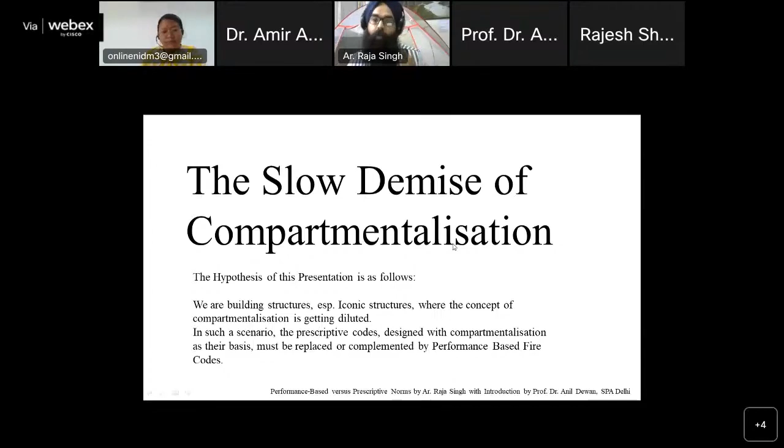The hypothesis of this presentation is that we are building structures, especially iconic structures, where the concept of compartmentalization is getting diluted. In such a scenario, the prescriptive codes designed with compartmentalization as their basis must be replaced or complemented by performance-based fire codes. We are seeing the slow demise of compartmentalization, and I will show you how.

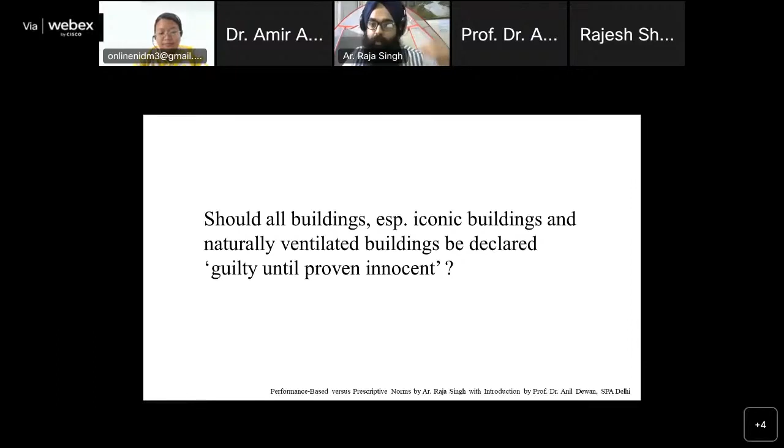I also want to ask you a question: should all buildings, especially iconic buildings and naturally ventilated buildings—and I'll tell you why naturally ventilated buildings—be declared guilty until proven innocent with respect to fire spread? So I want to ask you one common question.

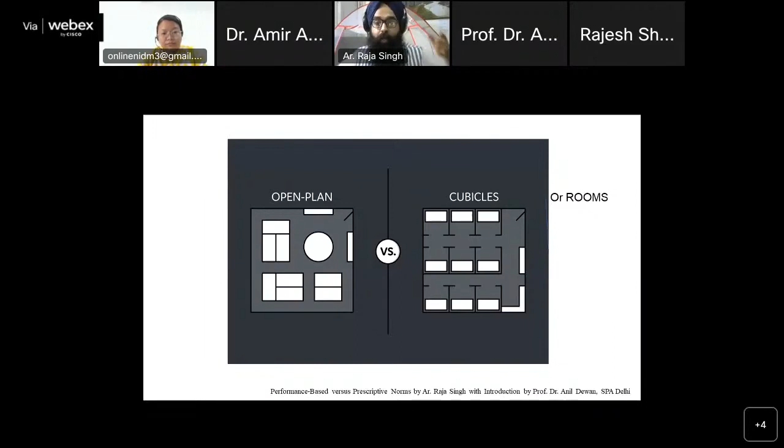The concept of offices has changed. Earlier it used to be room, room, room, closed room, and there was compartmentalization even in the way teachers used to be sitting in corridors. But today the concept is of open plan. We have huge floor plates which are open plan, and there is no compartmentalization. Not only that, there is vertical non-compartmentalization in buildings, which I'm going to show you.

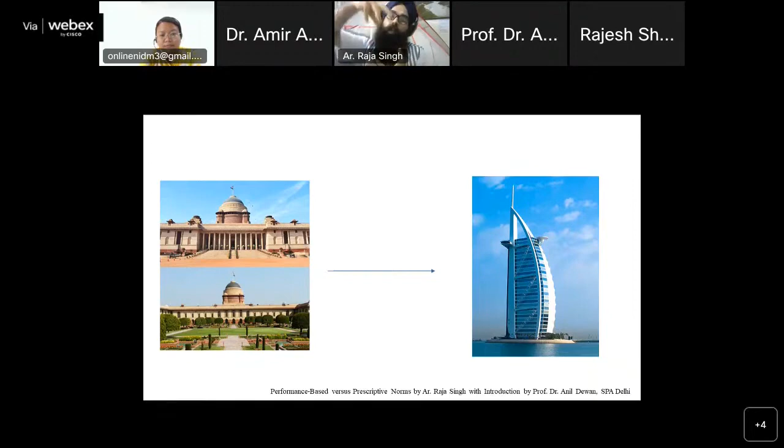For example, if we look at an iconic structure on the left, which is the Rashtrapati Bhavan, the way older iconic structures used to be, compared to Burj Al Arab. The comparison is that in one, compartmentalization has been key, while in Burj Al Arab there is a shell structure—not typically a shell, but inside there is a continuum with respect to the vertical space.

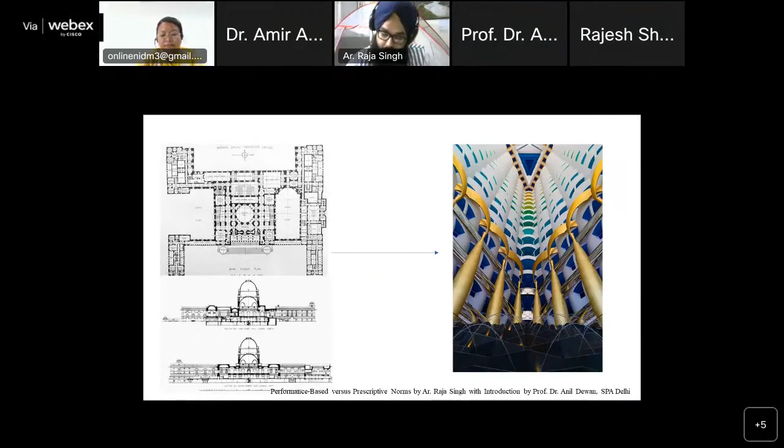This is the atrium area of the Burj Al Arab on the right, and on the left you can see how finely divided are the compartmentalized older iconic structures that we have been dealing with, the basis of which has been the formation of our prescriptive-based fire codes across the world and also in India.

I went, in 2019, to the Kartarpur corridor, Indian side, made by Creative Group, and I realized that this is such a huge space, like an airport terminal. Over there, sprinklers had to be put based on a prescription, because sprinklers have to be put in such structures based on a prescription-based code. But I want to figure out what is going to happen when fire happens in such a structure, which challenges the way compartmentalization has led to creation of prescription-based codes.

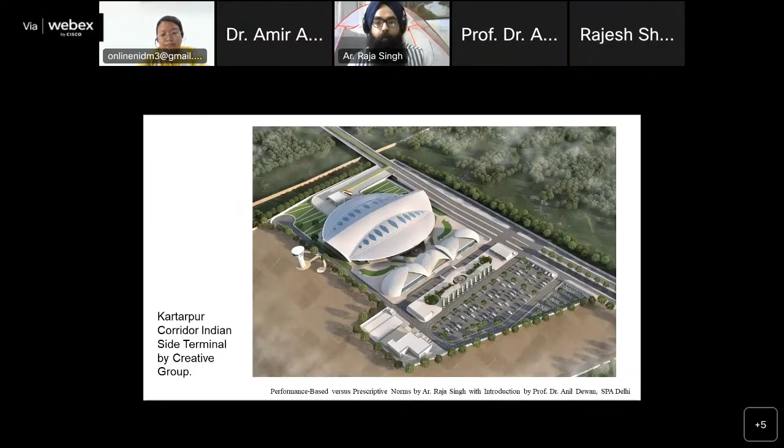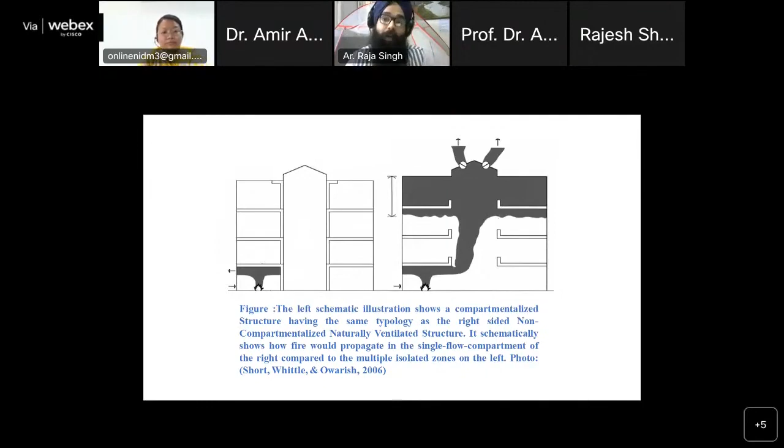But we want such buildings for other important things—continuity, beauty, aesthetics, and so many other things. So we cannot simply say no to such structures, but we have to take care of the fire issues in them. Traditionally we have been dealing with prescription-based codes, which are beforehand instructions, and compliance with which the buildings may remain safe. There have been cases where prescription-based safety in these buildings has ill-performed.

Our take is that fire performance of naturally ventilated buildings needs to go through the scrutiny of performance-based analysis. This system has been developed earlier through zone models like CFAST models, and finally to field-based models which also use CFD technology. This can be read as I talk further.

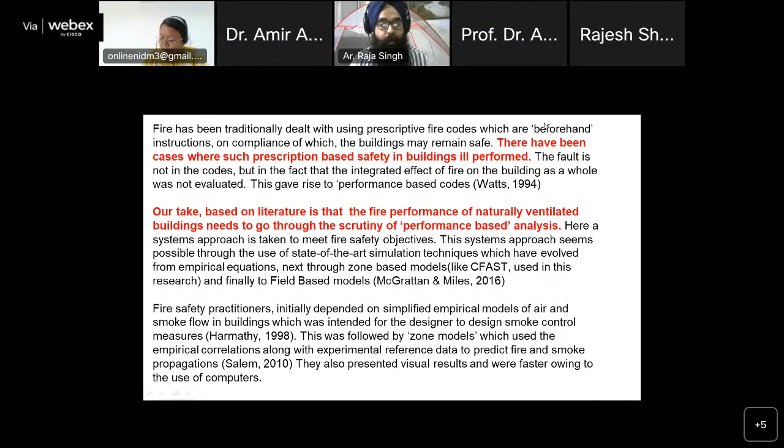Yes, let's see some simulations before I move forward. Can you see the screen, Yogita?

Yes, this is a naturally ventilated building typology, chimney type structure. Very common - this is from a very famous hotel in Chandigarh, the Marriott Hotel. On one side, they have created a chimney type structure, and on the other side there is a restaurant.

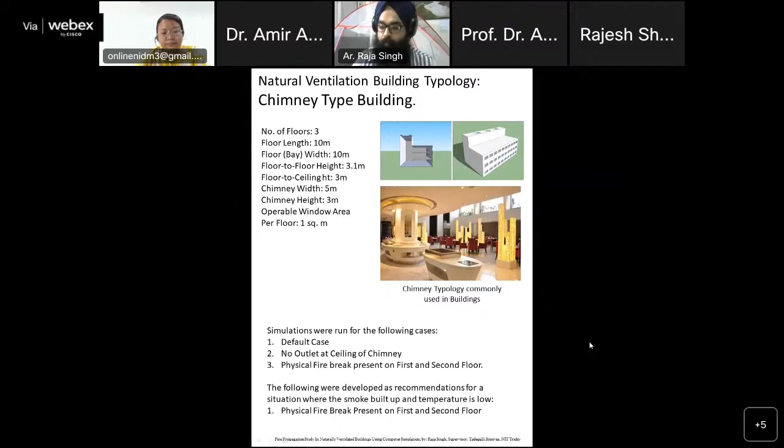You can see the various cases we have dealt with in this building. The first case is the default case: if the fire is at the ground floor, and even if there is an opening or an exhaust at the top in the chimney or shaft area, there is still smoke and high temperatures in the upper areas. Black represents smoke - there is a build-up of smoke in the upper floors, very much there.

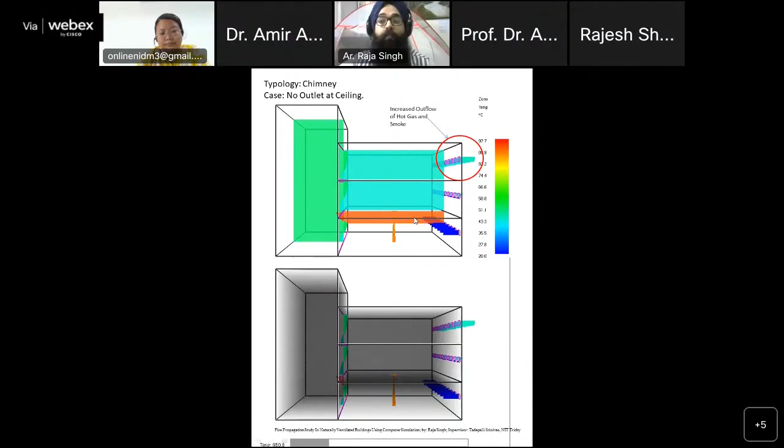Sometimes in buildings you must have noticed they simply cover the atrium as a retrofit for air conditioning and don't give requisite exhaust of the smoke. A consequence of this, as sir was saying, is that the building becomes air conditioned and the smoke spreads to other habitable areas where there will be people in the same space.

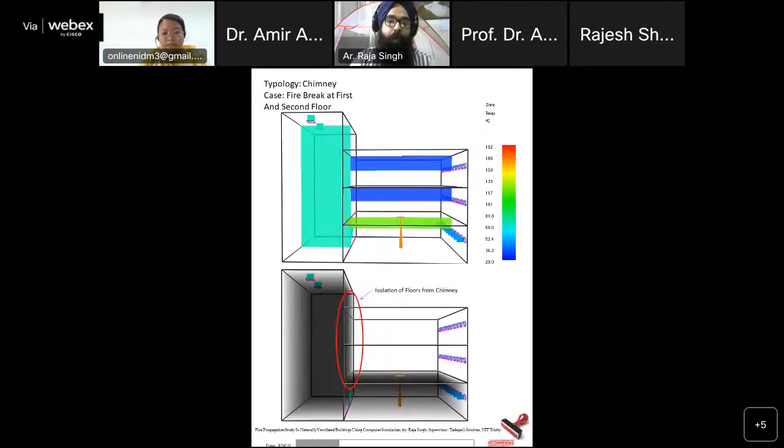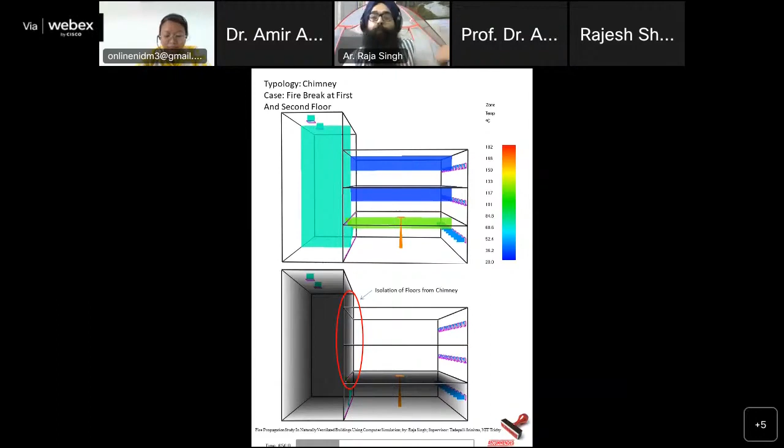So you can see a very easy representation of the same smoke spread. Same again, fire breaks at the first and second floor - if you simply use compartmentalization in these spaces, you see absolutely no smoke in floor 1 and floor 2. This compartmentalization always works, but for other factors we compromise it. That's an important thing - if we don't have compartmentalization, we have to at least check buildings without it against performance-based codes.

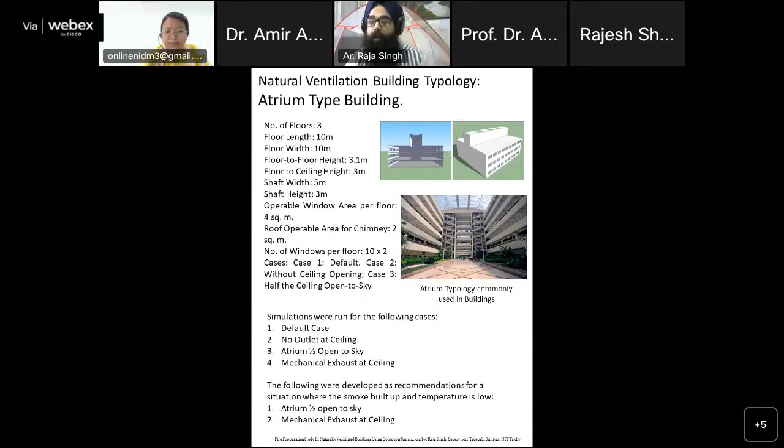So we have to have redundant systems which work even if the exhaust system fails during a fire. And we will see what happens.

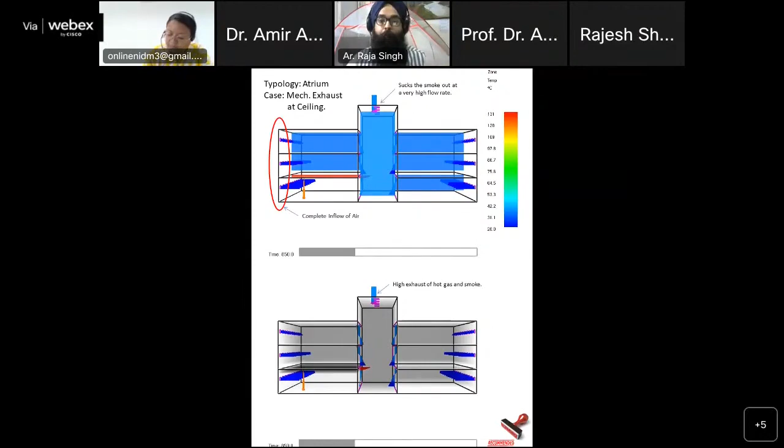Now here again, atrium with mechanical exhaust. Same result as making half of the atrium open. Everybody will agree, oh, mechanical exhaust, we already know, fire people know, fire engineers know. But what happens when this system fails? In that case, we need to have redundant systems which are openable, also available in such buildings. And the basis of what I'm trying to tell is that for such buildings, there should be an absolute requirement to make sure they go through a performance-based check.

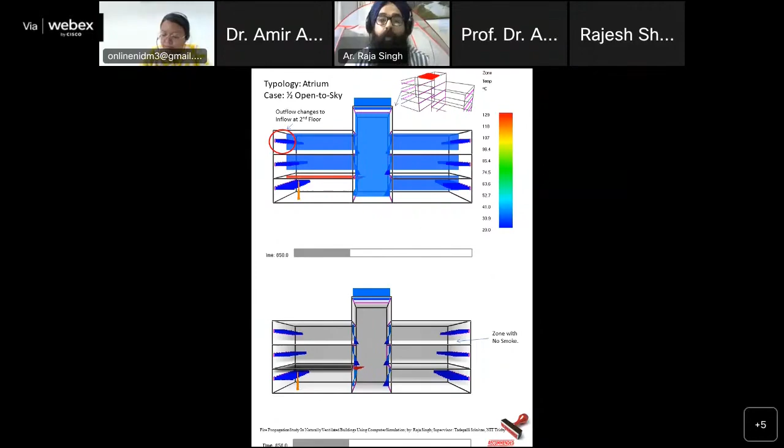So let's go ahead with natural building or the shaft type, as we have discussed earlier. Now, shaft type is like there are two shafts. This can be a not properly designed staircase shaft, or this can be a normal shaft which has been made for thermal passive heating, passive cooling purposes also.

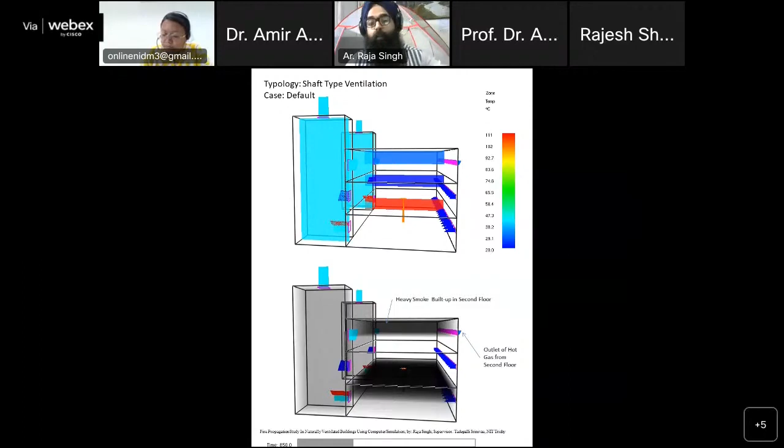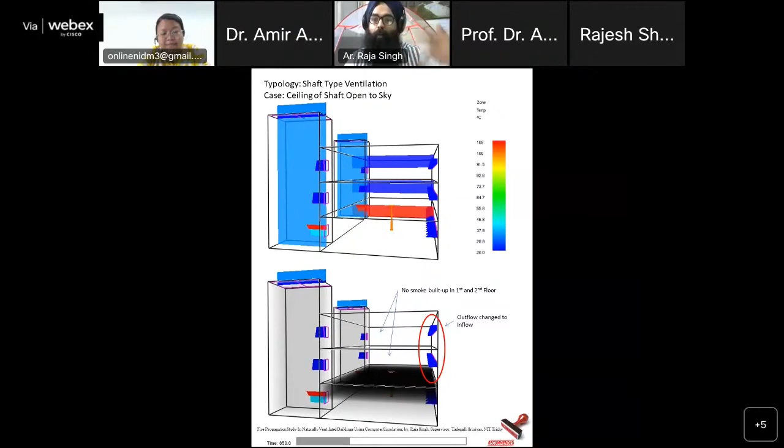Here you can see floor, there is fire at the bottom, and in the default case, the smoke automatically goes into the topmost floor. You can see if there is no outlet at the shaft ceiling, same performance, so much deep smoke on the second floor is visible. But here, if we open the ceiling or shaft open to sky fully, you see absolutely no smoke in the ground, first, and second floor—all the smoke directly exits. Now, what I'm trying to show through this, everybody will say this is common sense, but common sense is uncommon. So that is not being implemented in many of the buildings today.

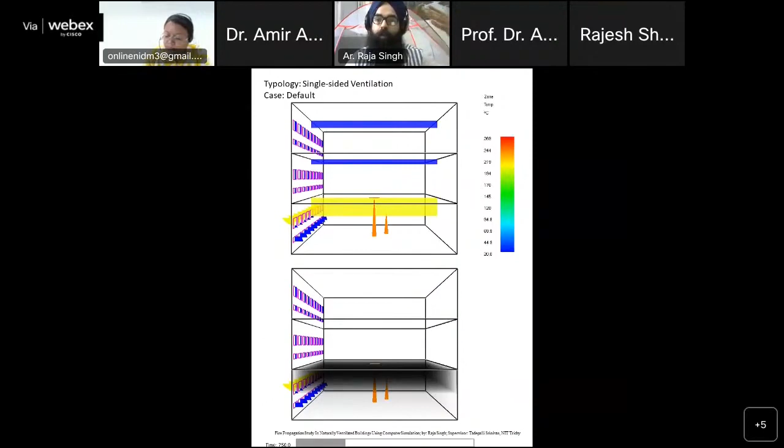Same in the single-sided ventilation systems also, it's compartmentalized, no problem, no sharing of vertical circulation, so no problem at all.

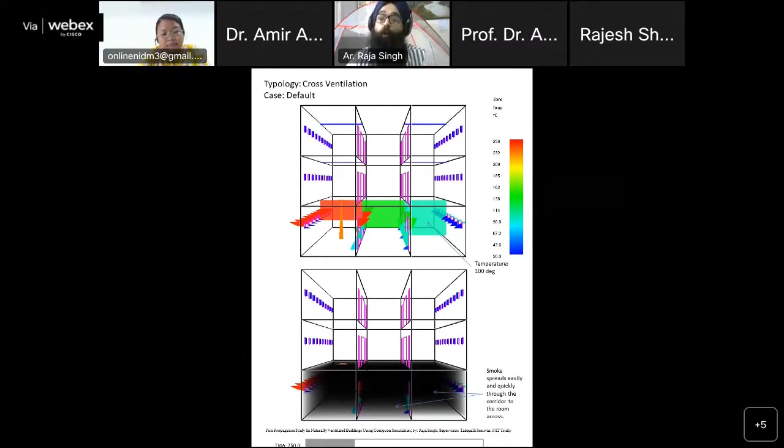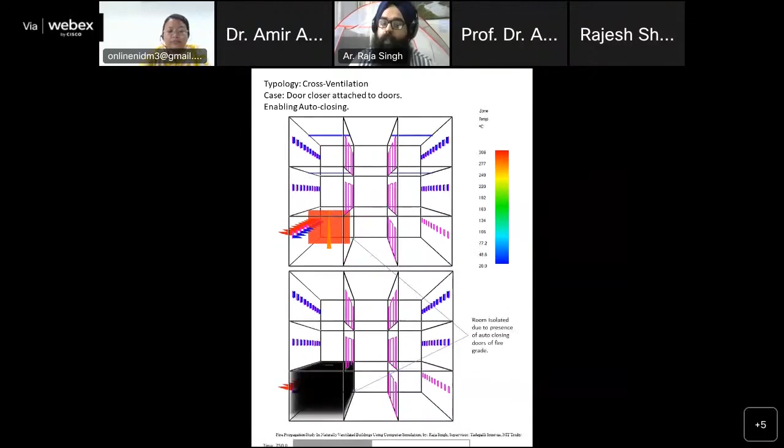Cross ventilation—here we have taken an example of cross ventilation where the fire door, as somebody was saying, auto closing was not working. So we have shown if auto closing was working and the doors are isolated, it just isolates. Perfect example of compartmentalization. Same fire, in this case, was compartmentalized and it does not spread. So this is the result. I can share it, it is available in a paper published by Time, Space and People. The point is references.

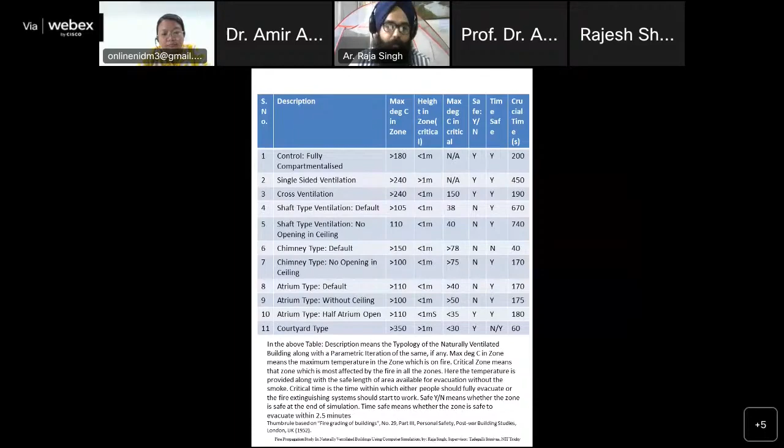We should, as a voluntary effort on the architect side, because now we have access to simulation systems—for green buildings we are already doing simulations—we should also make our buildings go through this. And so the point is the next step we have to go is performance-based systems which use simulations. Of course, there are limitations. Simulations are not perfect. Some architects may have issues getting access to such software and such experts who do it; it may be expensive. But such provisions have been made in the green building industry. Eco Niwas Samhita has been made very easily available for ventilation and other stuff. Efforts should be made for fire as well.

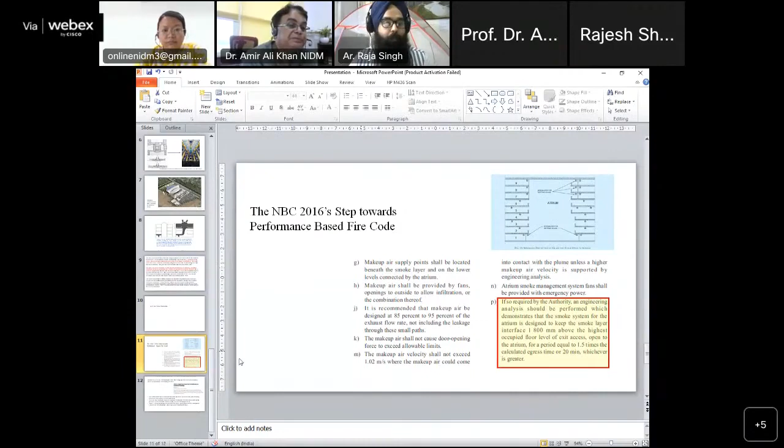Conclude, yes absolutely sir, only the last slide. Now this is about performance-based, is over.

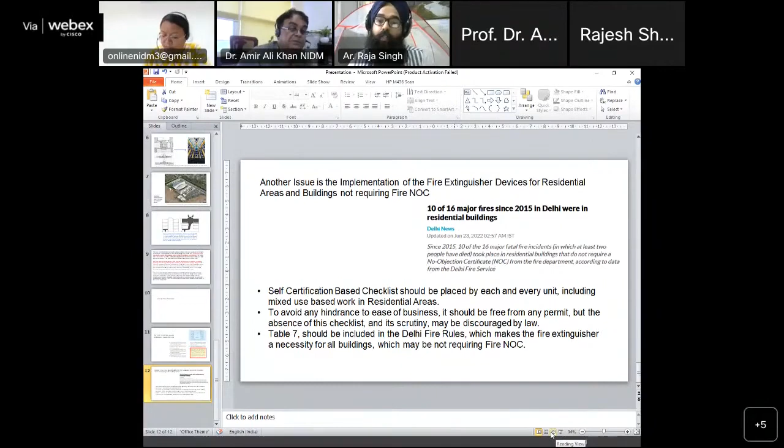Last slide. Another issue is implementation of fire extinguisher devices for residential areas and buildings not requiring fire NOC, covered extensively by respected Paul sir. 10 of the 16 major fires since 2015 in Delhi were of residential buildings. This is a Hindustan Times report.

We should have some kind of a self-certification based checklist, which, just like the shop and establishment certificate, should hang as soon as you enter a mixed-use type establishment, so that it creates a deterrent on the part of the owner that he has to maintain it. And on a random check, if he is found not following it, this should create some kind of a scare like a traffic challan.